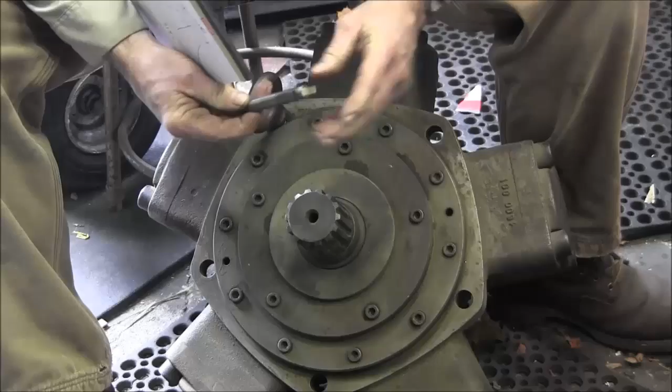We're making our pusher, and we have two blanks already cut off. We're going to be milling the slot to put in our own shape here. So we need to know what kind of shape to put in there, and using a combination of a couple different tools, we were able to create a drawing.

The first thing we did was play around with our bevel protractor, measuring from the top and down the side to get an idea of what angle it is, because this is an involute spline, meaning the splines are not straight up and down on the side, they angle in. Just by a quick eyeball, no light behind it and no magnifying glass, it looks like it's right close to 22 degrees. We're going to do a little math from another source to figure out the actual angle.

We also had our mock-up, basically a quick mold so we can play around with creating our shape in here. We want a little bit narrower tool, then go side to side, and this gives us a quick visual of what we're actually looking at when we go to sharpen up a tool bit, a quick reference to play with by eyeball.

The next thing we did was take our gear tooth vernier calipers, and we came into the width of the root, then came down from the top there. We basically got 312 thousandths at the base and about 165 on the depth.

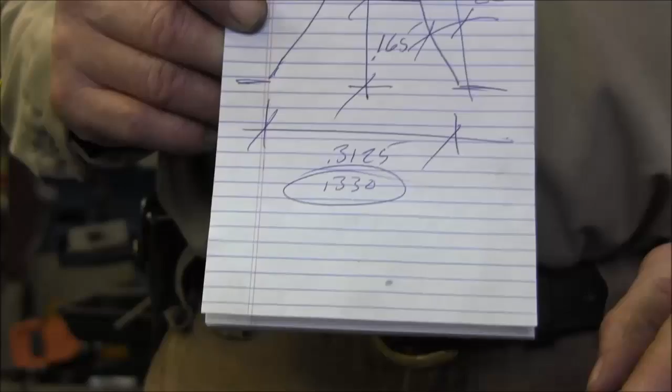We went ahead and took our flashlight, nitpicked looking at there, and we do come up with 22 degrees of angle per side.

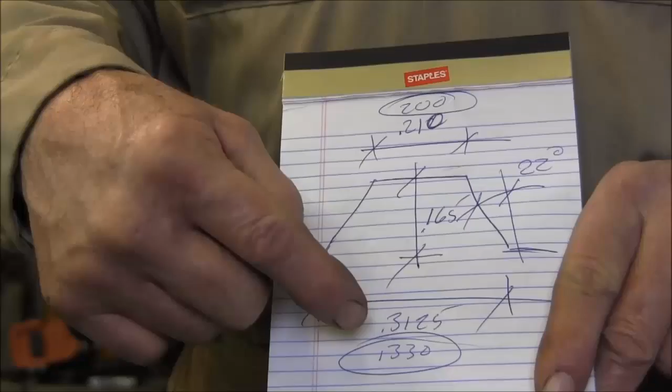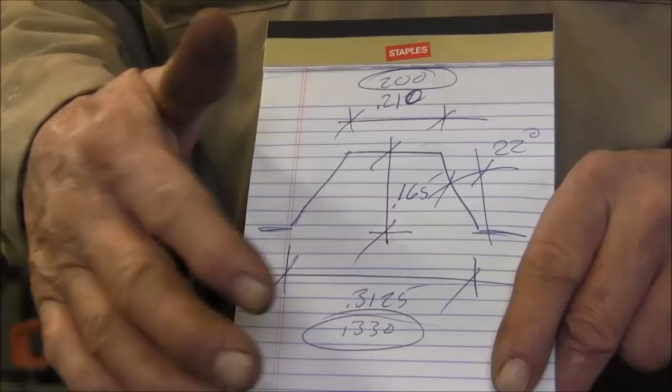We noticed that we were up on the radius a little bit. With the flashlight, we could see that we were actually measuring at like 312, 5/16, and it was closer to being like 330. This was the radius at the top there, so the whole height and everything else is pretty close to 200.

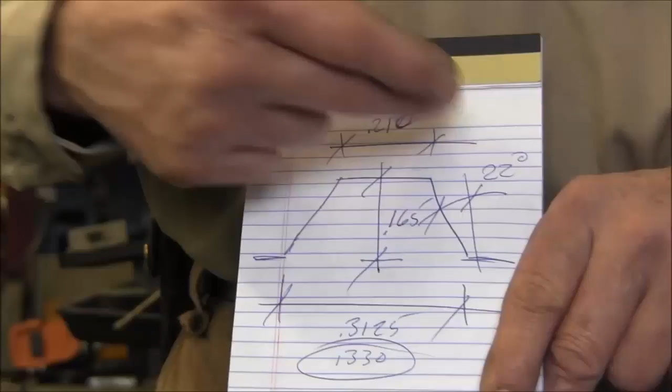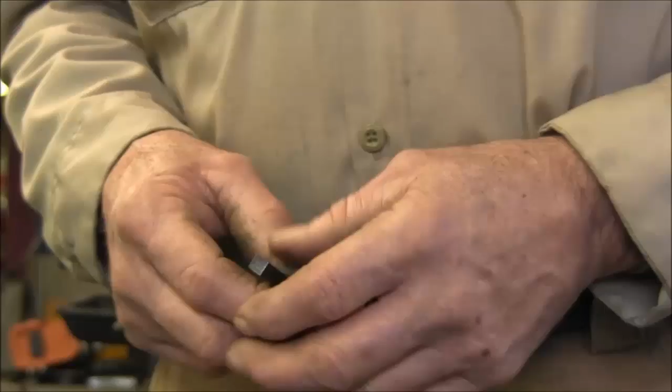That figured in with what we saw with the angle, and then we drew it out on our PlasmaCAM since we have that capability of laying everything out there, put the line up, and the line measures out 22 degrees. So basically that's what we're going to put in on this tool bit here.

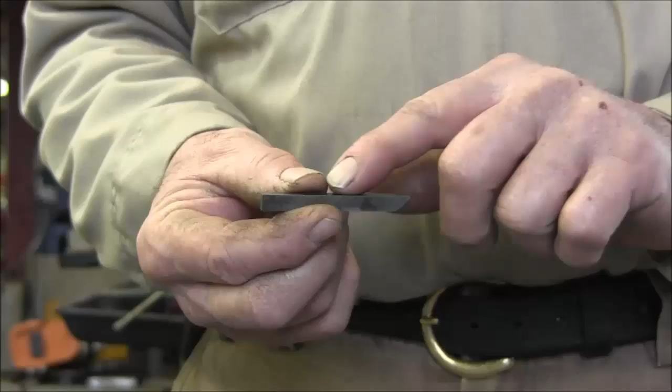Just a little highlight on tool bits. This is a no-name one, almost a rough finish, and it mics up about 2-3 thousandths larger. Somebody's just ground something on this one here, might even have been me, just to give it an angle to come in and kiss the chamfer or something in a single setup. I just broke that edge there, it looks like, or whoever did it.

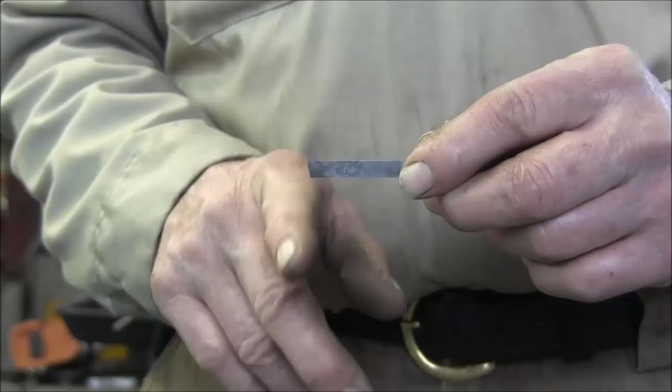This side is virgin, and you can see how most high-speed steels will have an angle cut on the tip. The reason is that automatically you're going to have some kind of relief on almost every tool that you fab. This one is quite steep here, and we're going to dress it off clean. Now we're going to basically just grind an angle here and an angle here on each side, and we have our grinder set up across here.

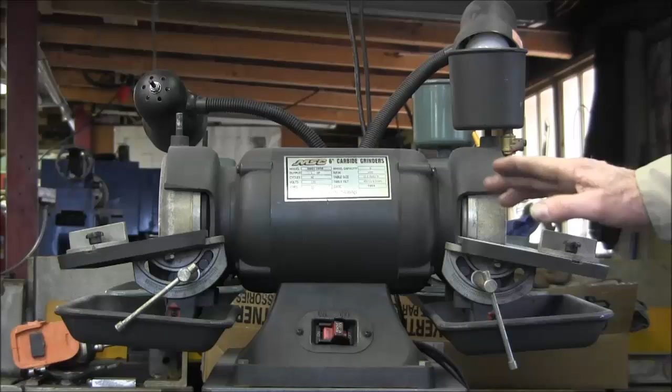Alright, now under here is the angle of the table. Right now they're both set at 10, and that's kind of just a rough grind that I have, because especially if I'm going to grind a brazed tool bit, I tend to knock the softer material away steeper, and then I go over to the carbide one.

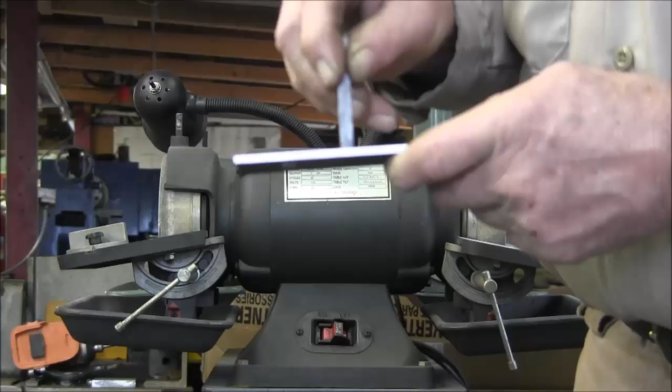I'll dress the carbide at a little lesser angle, because the whole theory of the tool bit being pushed across there, all you need is just enough relief. If you have excess relief, it makes your cutting edge or leading edge sharper, and it also becomes less reliable. It will wear faster.

Okay, the less that angle is, the more it has to go rubbing and creating friction and wearing on your surface to dull it. So less angle means a stronger, longer lasting tool bit.

Now because we are working straight lines, I don't need a whole bunch of side relief, so we're going to go ahead and adjust this, and I'm just going to give it about 6 or 7 right there.

That's still a good amount, just slightly less than what's normally on the end of there. We're going to do that to both of them, doing this as a mirror image project here.

Alright, and double check it again. I turned it sideways so it's actually flat and I can physically see. And you turn it that way and it's pretty darn close, a little bit less than that.

Alright, both of these protractors I got set for 22 degrees. Both of them locked, both of them angled back.

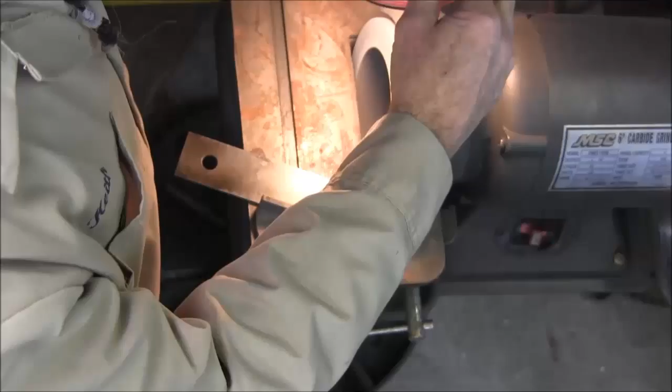We're going to start on this side here, and we're going to work it on what we call the top, and that's going to be called the top.

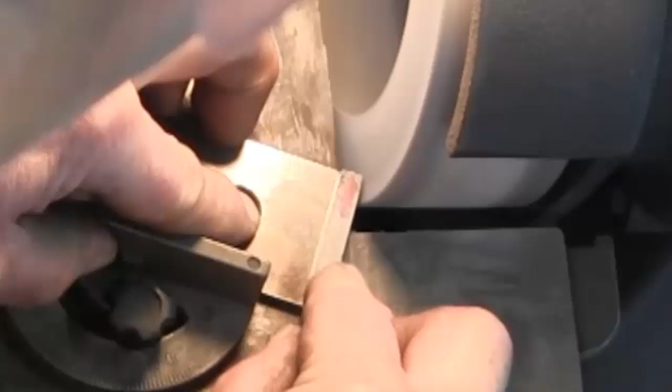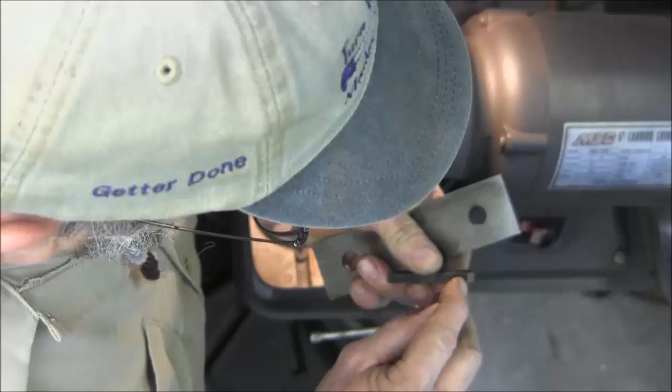Now remember, we're only going to be a little bit around 165 on our depth, okay? So this measurement of grind here only needs to be 165 plus a little bit. We just always want to keep a little bit of cutting area up here.

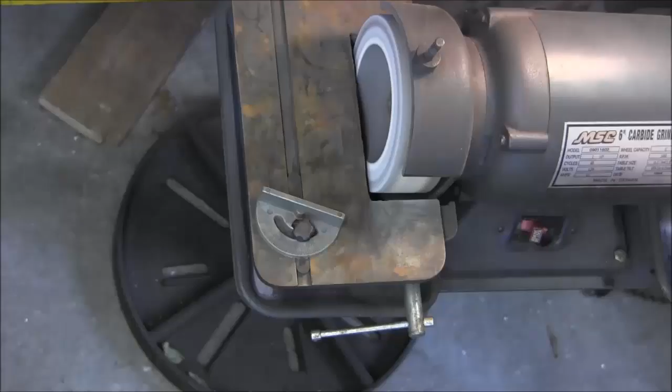Okay, that's pretty good. We're going to go to the other side, and we're going to knock a little bit off of this other side. Switch hands. Sometimes that's a good thing.

Keep moving your bit. Okay, now I'm just looking for that width to be about the same on that side as that is on that one.

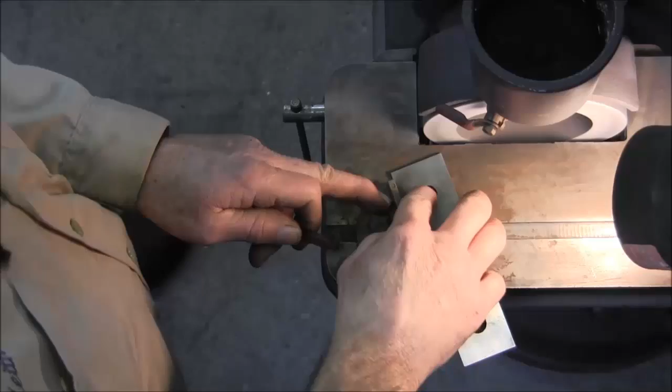And I'm able to keep this in even though I let it flex back and forth. I'm still working that angle. I'm moving this again because I just didn't know if my fat head was in the way or not.

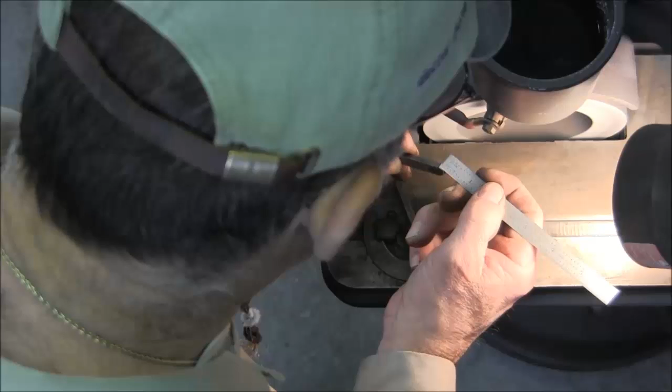I'm just setting my parallel out of the way. I want to actually look and see. 160, about 160 there, total straight depth.

About 150. The width across the front here, about 140.

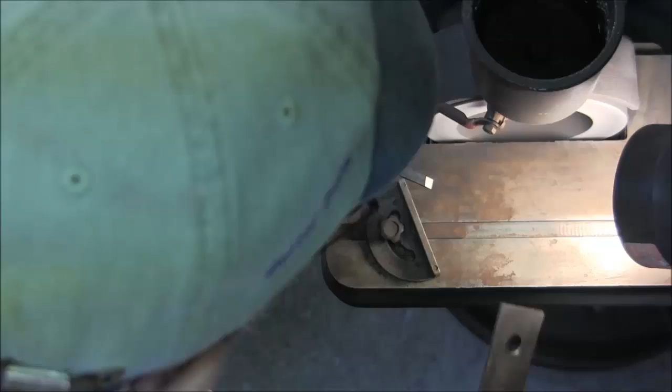Alright, we're going to take her a little bit more on both sides. I want to make sure that I have the depth. Okay, that definitely is long enough there. Alright, I'm going to kiss it on the other side.

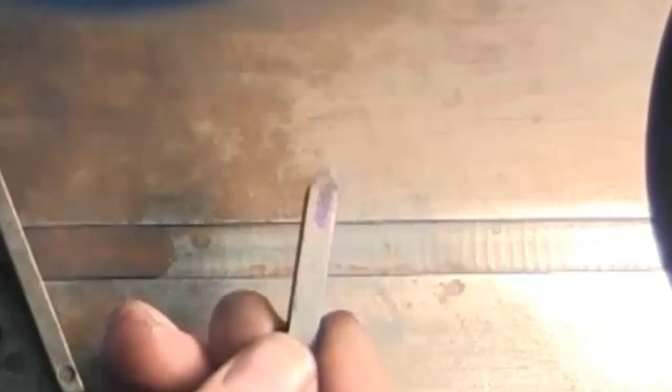Okay, I'm going to get a small square so that I can hold it and see this leading edge and that leading edge there. And by eyeball, I'm going to make them even. And then we're going to go for dressing off the nose piece here.

Taking my precision square here and taking a glance at both sides. Okay, I'm even with it on that side, and this side here looks like about another 10 thousandths. So I'm bringing it over here, and I just want to take another 10 off of it.

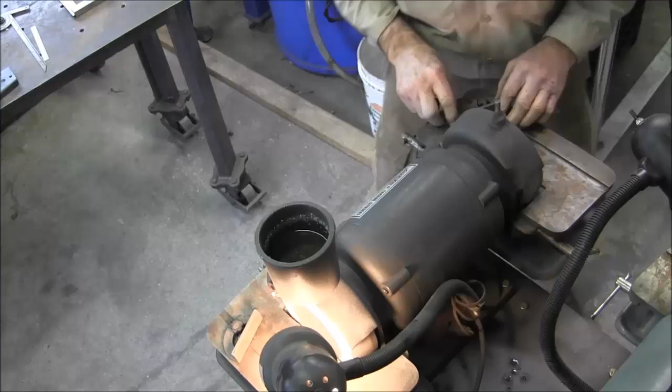Alright, we're going to approach this real slow. A little bit more.

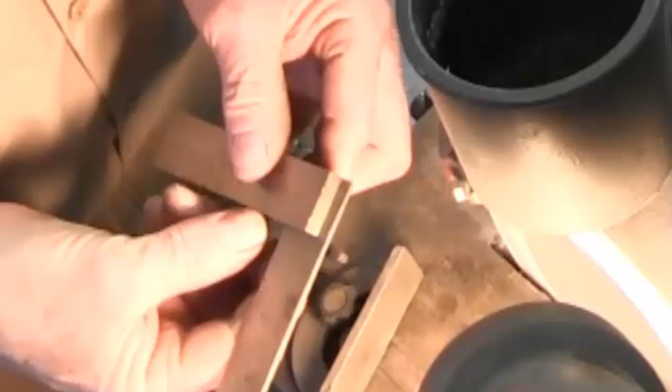Alright, I like that. We're pretty even. Now, straight in depth here, it almost looks like about 180. And I need to be square.

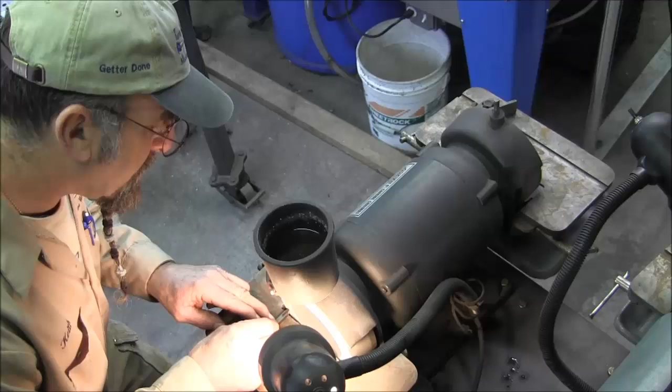That's a little bit less than the stock grind. And now I hold that up so that I can see the light behind it. And I need to be slightly angled this way here. Ever so slightly. Alright, I like that.

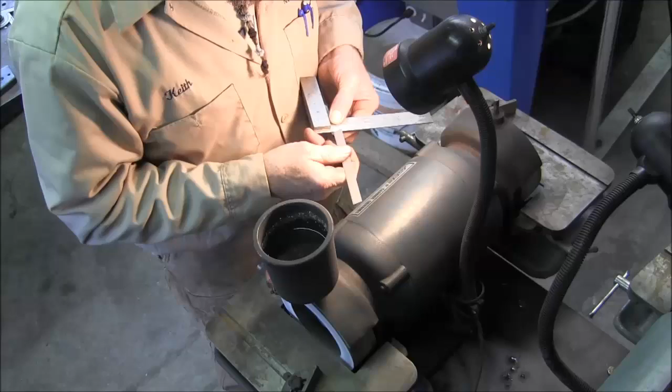Alright, I'm just double checking depth here. Like 190 thousandths or so. Alright, now I'm going to stone this, and then I'm going to be happy with those angles and everything else.

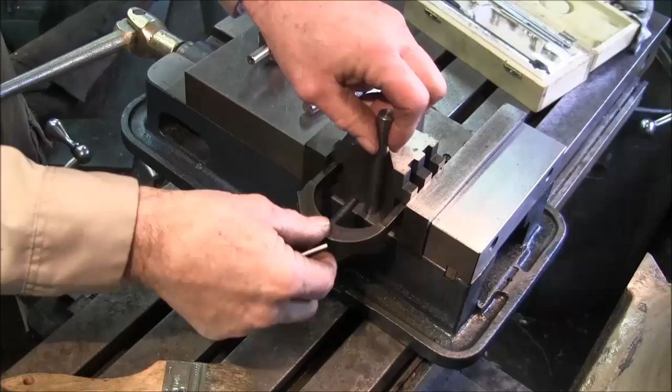We got a V-block clamped in here, and we get our rod pushed in here. We're going to do 2 clamps on here. Alright, and we'll take the Allen wrench here and put them in there and snug those up. We know it's not going to go anywhere.

Alright, now we want to locate this pin so that we're going to be center line with it. We're going to go ahead and pop in our coaxial indicator. Just convenient because we're using a 3/8 collet for our tool bit, and that also is what the coaxial indicator uses here as well. And I like to use this reach around here. And let's get it in neutral here. Okay.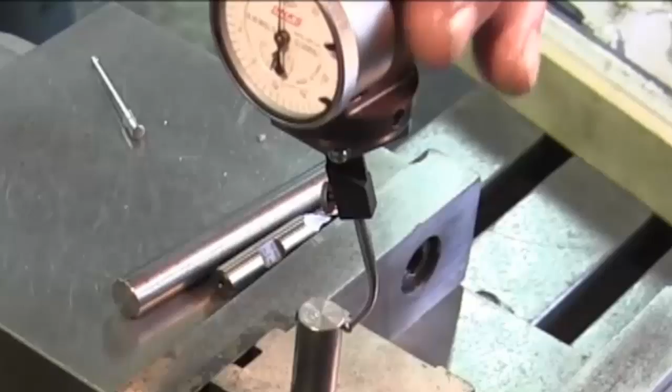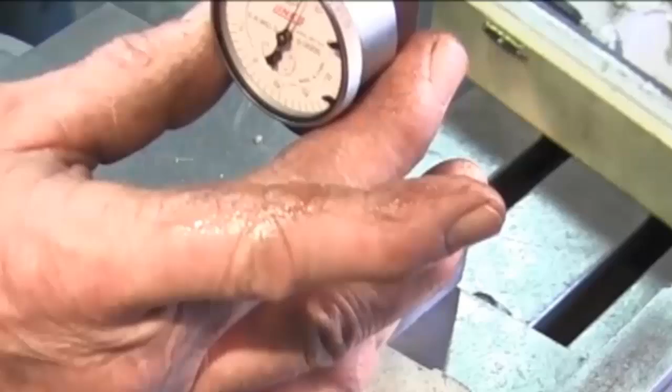Alright, now we're going to bring it down around here, and then we'll spin it around. Alright, close enough. We're going to turn it on.

Alright, I like her there. Alright, we're going to call that close enough to being 0 or center with that rod. And I locked all the tables and everything else. And now we'll double check it, just because I know that when I lock my tables, it does make a difference, as you just saw. Okay.

Alright, now we got our end mill in here. And we're going to go ahead and raise our table up after we tighten this end mill.

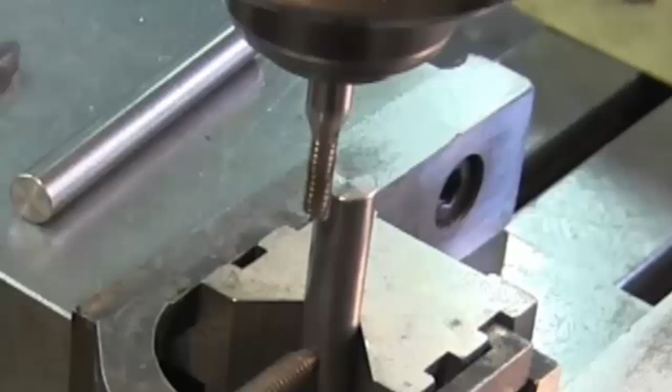I'm just feeding it gently across there. You can see that the chips are real white. Even the little burr that comes off the other end is still white, so I'm not overheating anything.

I'm going to see if this fits in here at all. And it doesn't. But I didn't expect it to. The tool bit is roughly a little wider than 1/4 inch. Alright.

That was like 200 on the depth there. Okay, we're going to go down to 225. I think that's going to be great. And I'm going to step this to the side about 5 thousandths each way. Okay, 5 the other way.

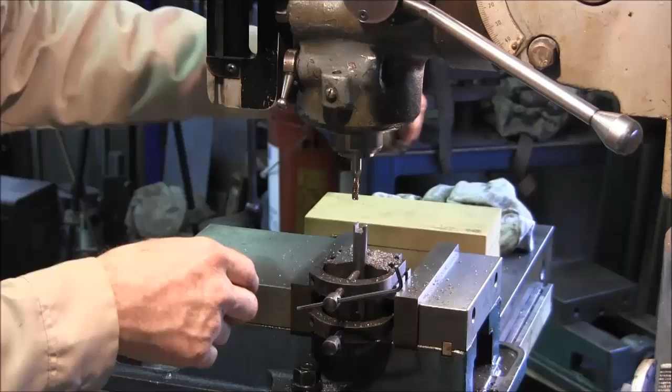Alright, back to 0. Fits right in there. We're going to be doing a little tiny bit of filing and deburring all the way around the whole edge here. Alright, and

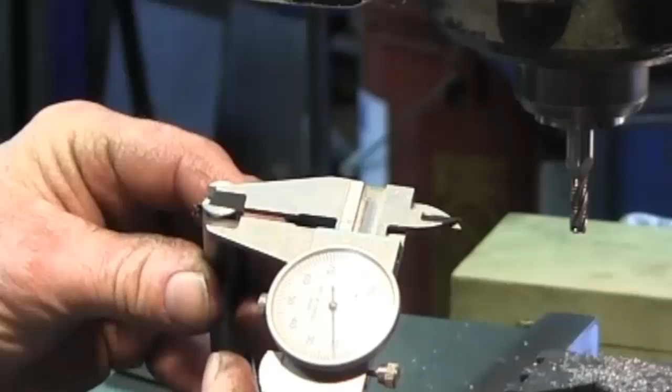Just for, let's see what we got, 117, 117 and a half. Kind of, I mean, this affects it over here. 118, 16, 17. Yeah, if you jiggle it till it goes lower, I mean, it finds the lowest spot in there. But we're within a thousandth of each side there, so we're pretty center.

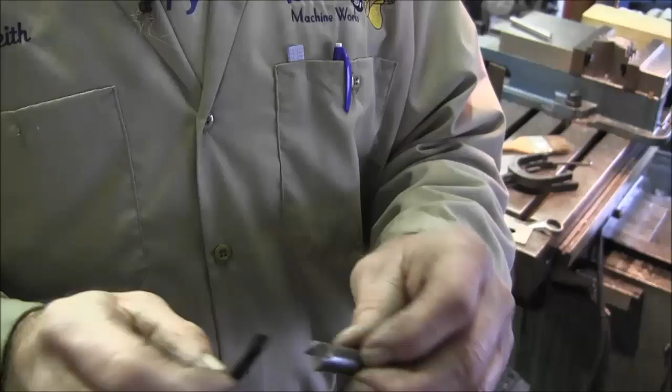I'm happy with that. Alright, we're going to go ahead and deburr this, and we're going to get this tool bit set up in there. Alright, I'm all happy with it, I deburred all of this, and we're going to go ahead and radius these corners slightly so that it'll fit all the way down in there. There's just a little tiny bit of a gap right at the underside there. I've got this marked off.

Now I'm going to go over and take my abrasive cutoff wheel, my little 3-inch pneumatic cutoff wheel, and put it in a vise, and I'm going to cut this off, and then I'll go dress the rest of this in the grinder.

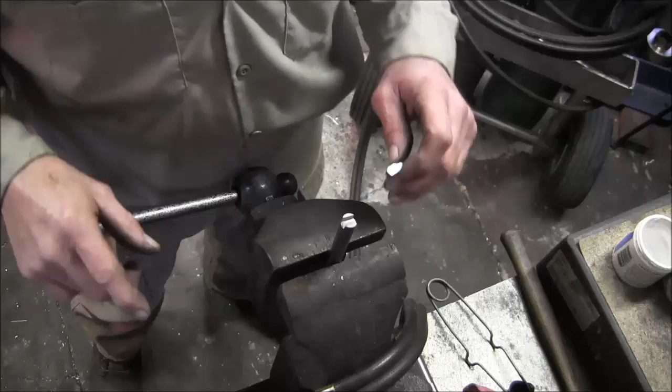Alright, I know you guys have all seen me silver solder before, and here's our tool bit ready to go into here, and we have a little bit of clearance in there, but this thing is going to be centered and held straight, and we'll be able to align this because we got this sitting out slightly, and we'll be able to square it as well.

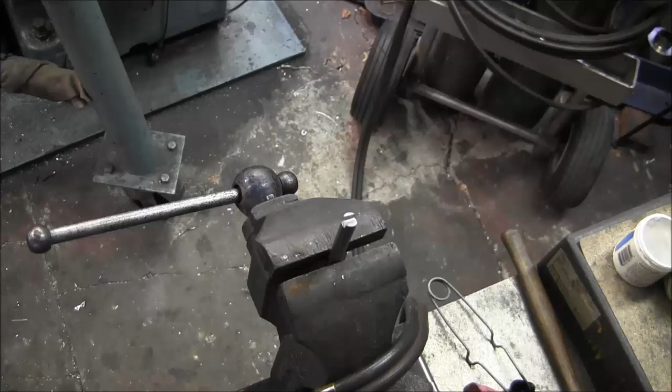Alright, we got to get some flux in here, and of course I like a Q-tip there, or a screwdriver, just because my fingers are starting to get a little fat.

Alright, so we rub that all in there, and this is the bottom. So we make sure that we're painting the bottom and the two sides. Alright, and we want to put this in here flush with the end, something like that.

Now the other end of the Q-tip, we'll go ahead and just wipe that excess right off of there, off the top face there. That looks good.

Just in case we need something around, just to push on the top there, and this quarter-inch rod will be able to do that. We'll keep that handy. Alright, we don't want to lose that. That's our ground off piece of tool bit there. We want to make sure that doesn't get knocked into the trash.

We haven't used our small bottles in a while. Alright, nice calm flame. This ain't going to take a whole bunch of heat.

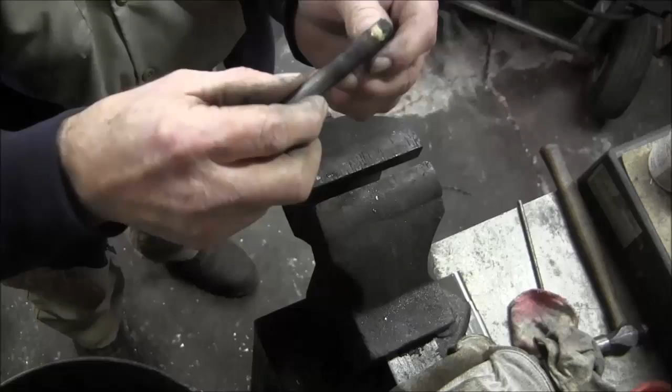All right, I'm gonna hold this up for you. Hopefully, we got a good view there. All right, you can see the silver solder is really dripped out around here, and you can't see too much along the front, but that's good.

I like that sharp edge right there. It lets us, after we wire wheel clean this, it'll give us a straight edge so that we can set this with a square or vertical or horizontal. Also, the silver solder has come all the way through and flowed right underneath the front, and you can also see the leading edge where it climbed up both sides.

Alright, we're gonna have a good solid bit right here. Alright, and still nice and sharp. We're gonna be able to stone that surface right there, get a nice smooth edge on it.

Alright, I'm gonna go wire wheel and clean some of this silver solder bulbous bump and all the flux and everything else off of there.

I just have this triangle stone, but it doesn't really matter. It's the type of stone that's more so important than anything else, and that's just so that it's actually able to go ahead and stone a high-speed steel. And all we're doing is taking that black surface off of there and making sure that the edge is crisp and free of any burrs, and we're just hitting each side here of the cutter.

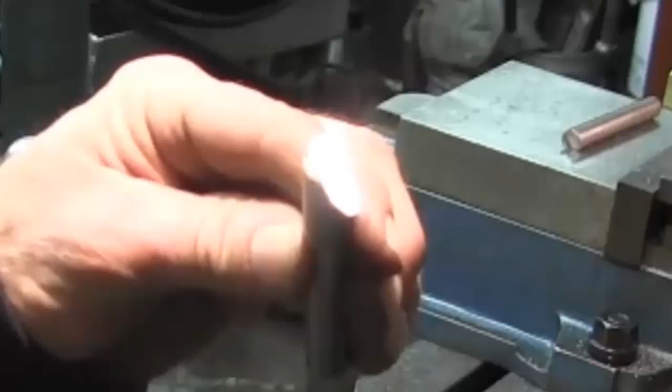It's just my surface on there, I brushed it on the stone there as we brought it out here, so we have a nice crisp surface there, and I can go ahead and align this edge here with my square off of the table, right like that. Alright, so then I know that this is square.

Alright, we're going to go get this set up in the machine. I'm going to show you how to set this in and get it square, and also create a center to center alignment, tool to part.

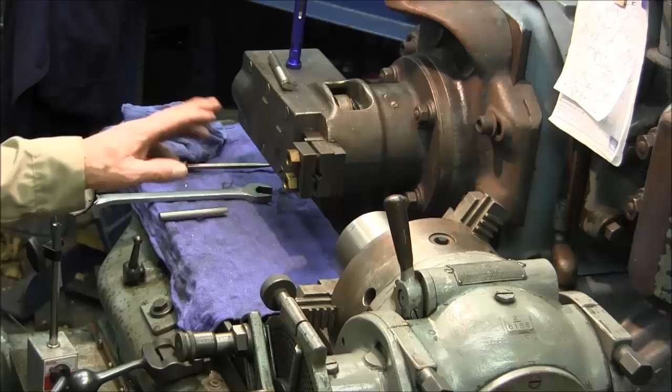So what we're going to do is we want to go ahead and align these two to each other. Now, I can't do it with putting our tool bit that we're going to use in there. So the one that we decided was a spare, we're just going to put that in here so it represents the round shaft, which our bit is centered on.

So all we need to do is create center of this, and that would be exactly in line. This is already lined up to the table, and this is already lined up to the axis of the table as well. Alright, so we got this. We're going to pull our part out of here, safely out of the way.

Alright, and then we're going to go ahead and put an indicator on here, something like that. Now I'm going to reach over here, and I want to try to get an indicator to where it's either 100%, yeah, facing away from us or facing towards us. Okay, and it looks like we're going to have better luck on this right here.

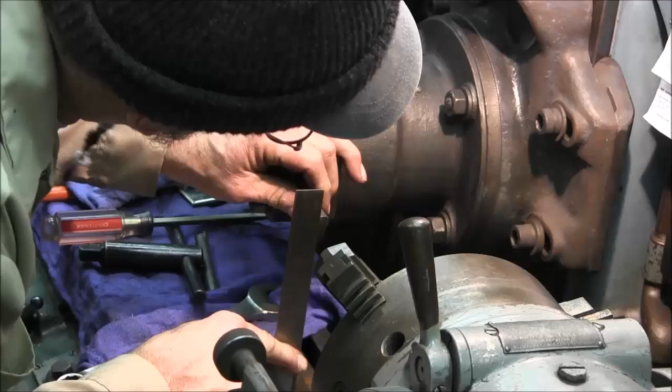Alright, now we're just going to go ahead and pivot this side to side, and we're holding our square down against the table here, and that right there is square.

We went ahead and tightened this down. We verified that we have a square tool bit on both sides.

Now we're going to go ahead and put our part back in. We're going to add a little dye. We're going to start setting up to make this index create 14 different spots for the splines, to put the splines in.

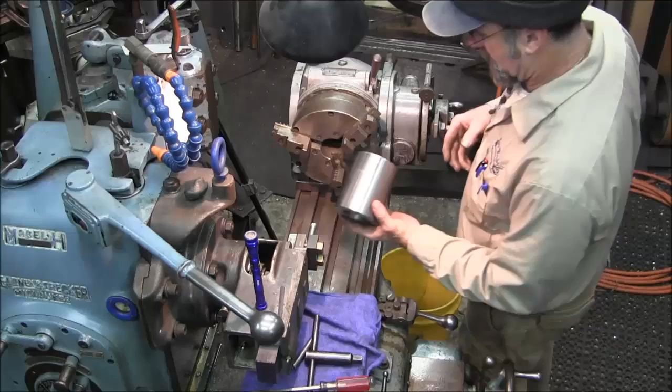Alright, we're going to go ahead and put our part back in here. And we're nice and clean on there. And we got to bring this back up here.

Alright, now that we're centered here and we've got the tool bit in here, we're going to go ahead and fire it up, and we're going to set our in and out stroke here. But we're going to paint up the bore here first because we want to kind of see that.